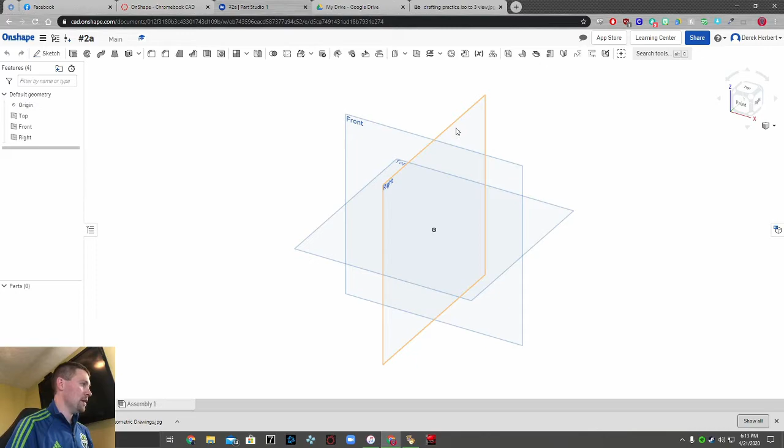So we are going to start on number 2. I know we already got a number 2 in here, so just name this number 2A. Make a new document and call it number 2A. This is on the second document that I gave you. If you want to practice on the other ones, that'd be cool too, but we're going to start on number 2. It says page 230 at the top left. If you see that, you're on the right page.

Okay, so we're going to start a new sketch and select the front view here. These are a little bit more detailed, I guess. We're going to hide all planes here, so it's going to end up being a lot like the first example. We're just going to cut a little tiny piece off, so we're going to show you how to cut things off, cut some of the material away.

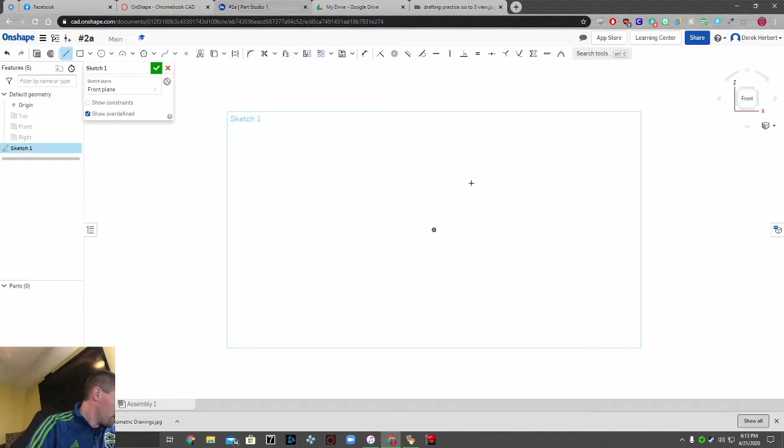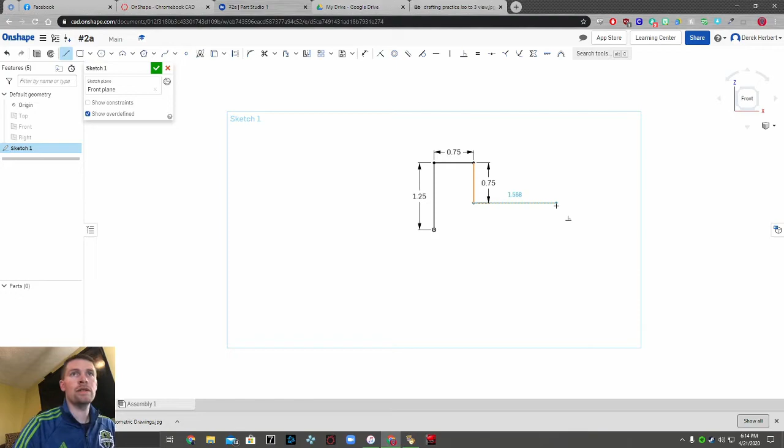So let's go ahead and start by building our part here. It looks like it's going to be 1.25 tall. This edge is 0.75. This will go down 0.75 this direction. 1, 2, 3, 4 blocks is 1 inch. Down and back across. Okay, so there's your dimensions. Again, I'm just multiplying all these little boxes by 0.25, so we'll be working with those dimensions.

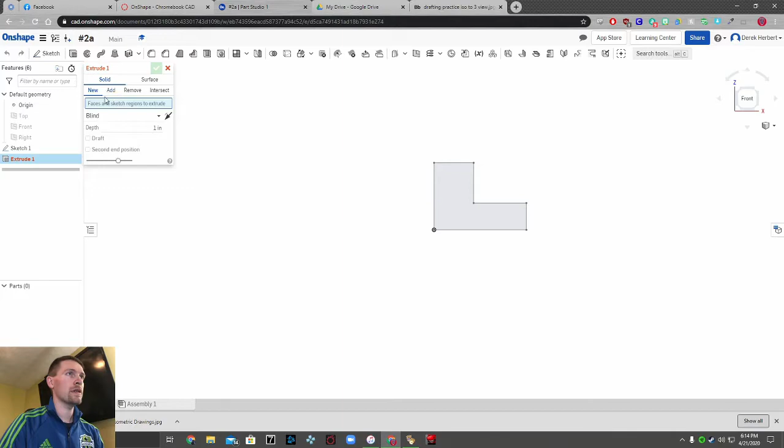We'll click accept, we'll extrude it, and we're going to extrude this box. 1, 2, 3, 4, 1 inch. Bam. Alright, once you got that, we are going to make a new sketch.

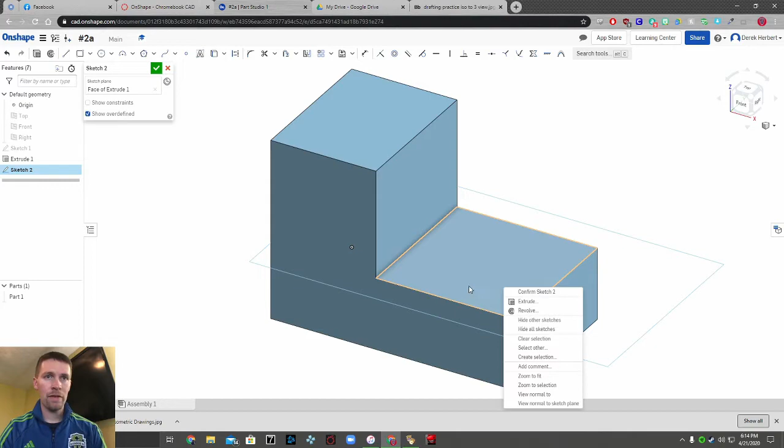We're going to cut out this section right up here in front. I'm going to make a sketch, click on the top of this box right there, then we're going to look at the face. If you right click on it, go to view normal to. I'll rotate you around, and we're going to draw a rectangle from the bottom corner.

Blam. This is going to be 0.5 down here, and 0.25 across the top. Alright, and we are going to try and cut this out.

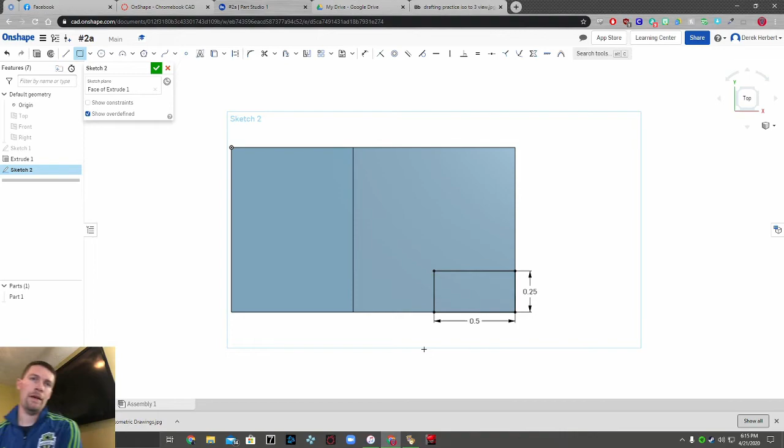Oh, say hi, Clayton. Say hi, everybody. Or not, he's still tired.

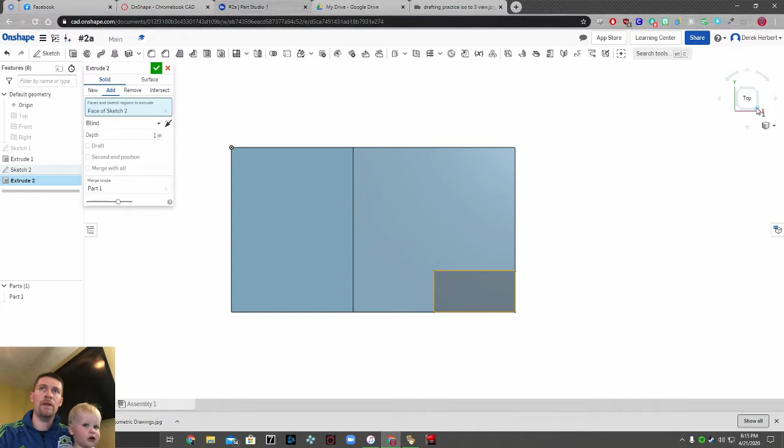He just woke up. So we're going to click on the old green check mark up here, and we will extrude this by clicking the extrude button. We'll extrude that thing. I'm going to go to this side, to one of these corner views. We want to remove it this time, so instead of add, we're going to go to remove. We'll cut our little hole, our little notch right there. So remove just cuts a piece of your part off. We'll accept that, and there you go.

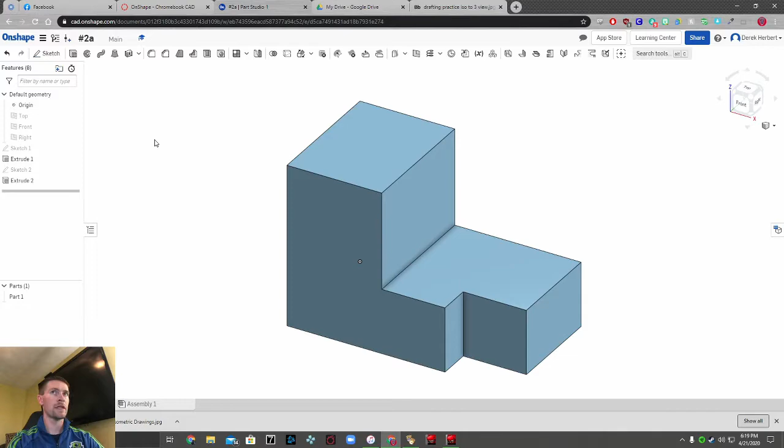All right, so we're going to keep on cracking here. Let's go back to OnShape. We're going to create a new document once again. This time we are going to do number 4. I think this is the only number 4 that we've got. Yeah, so we'll leave it at number 4.

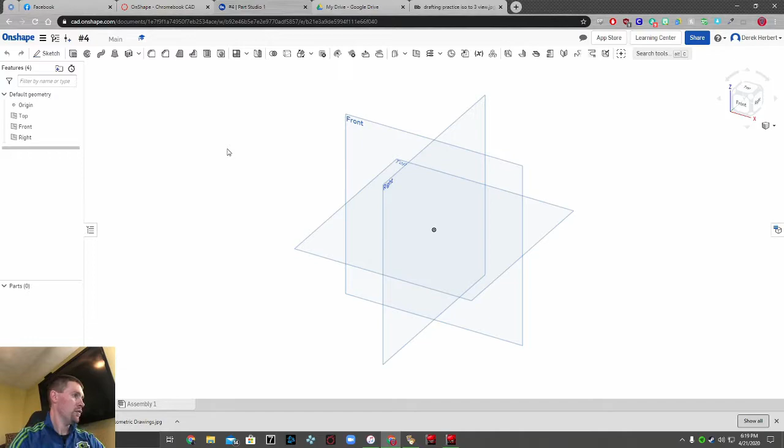Okay, so number 4, again, if you look at page 230, we're going to start with a new sketch on the front. Off all the planes, and we are going to look at the front view here. We're just going to do a rectangle, so start your rectangle, again just click.

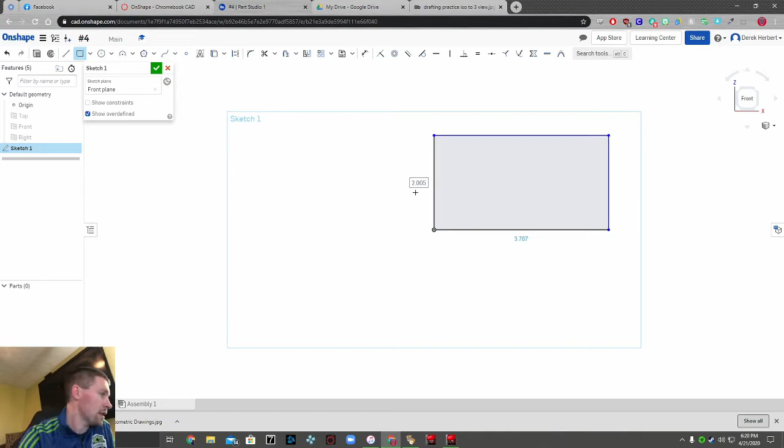We'll put on these dimensions here soon. And it looks like if you just mouse over the dimensions, they get selected, so that's pretty good. So we need this thing to be 1, 2, 3, 4, 5 tall, so that's 1.25. And the width, 2, 3, 4, 5, 6, 7, 8 is 2 inches. 1.25 by 2 inches. We will go ahead and accept that sketch.

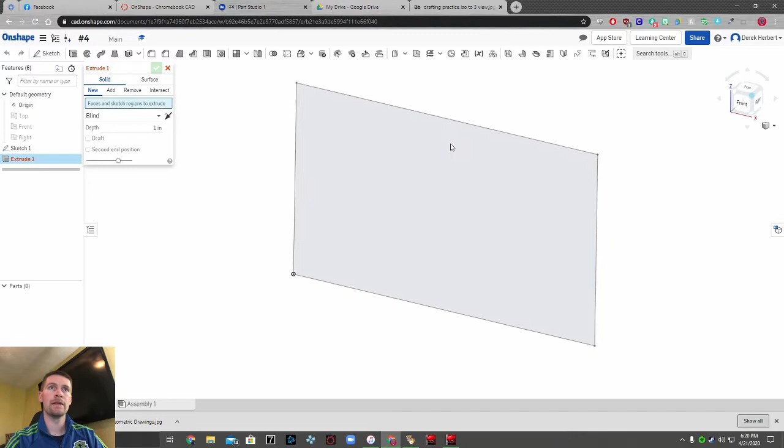We're going to extrude it. Extrude that block. This is going to be 1, 2, 3, 4, 5, 1.25 wide, 1.25 there you go, is our depth. Boom, there we go, there's our basic block.

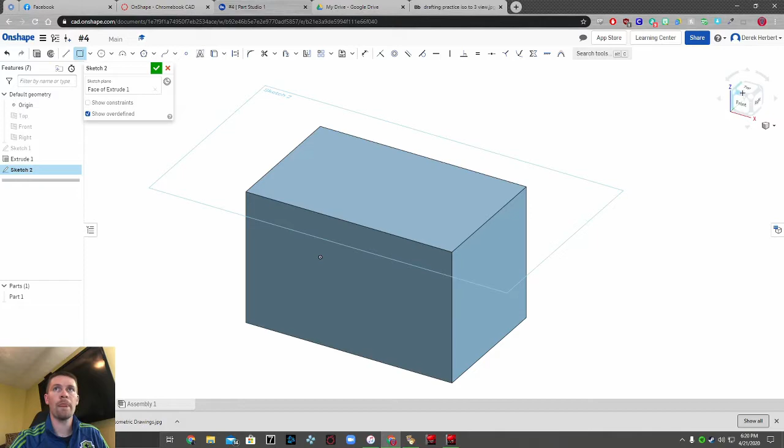So we're going to cut. We're going to make a new sketch on the top piece up here. So just up top here, we're going to draw a rectangle on the top face. We're going to start somewhere, it doesn't matter where on this line, just try to stay close over here. Just don't start it on the corner, it's gonna not work. Start somewhere down there on that line.

This is going to be 0.5 tall and 0.75 wide. We're going to use our dimension tool like we did last week, dimensioning from this line to this line, which is going to be 0.25.

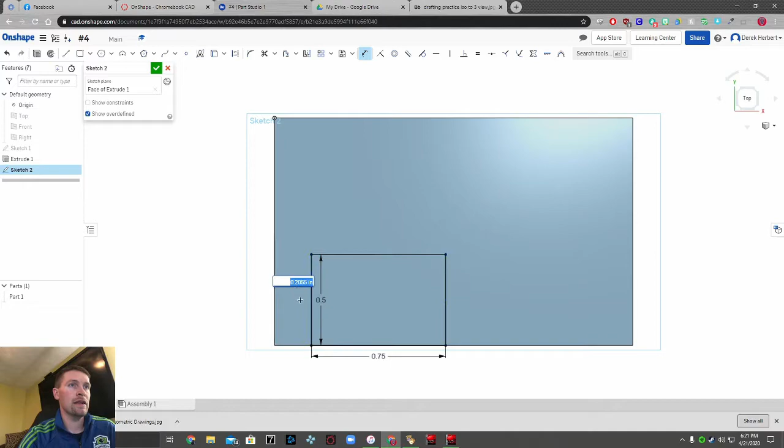Now we're going to extrude that. Let's click the green check mark, go to extrude, and go back to our isometric view. We're just going to extrude this piece right there.

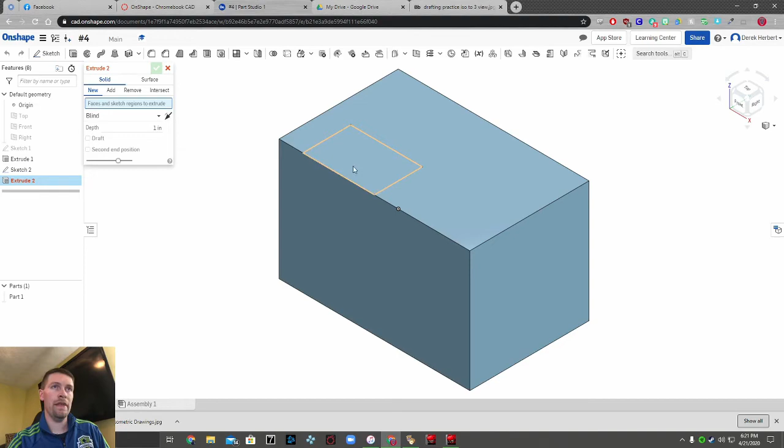We're going to remove it, so click on remove. We want this to go all the way through our part. You can click on that arrow and type in 1.5 or 1.25, and click OK. That's our first cut, and the second cut only goes about 0.75 deep.

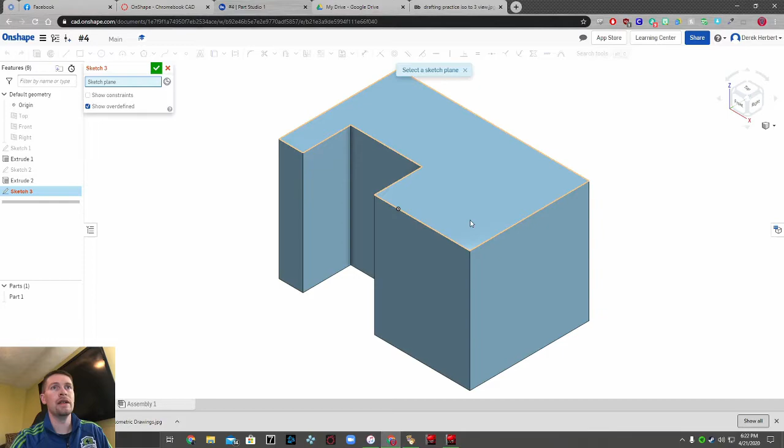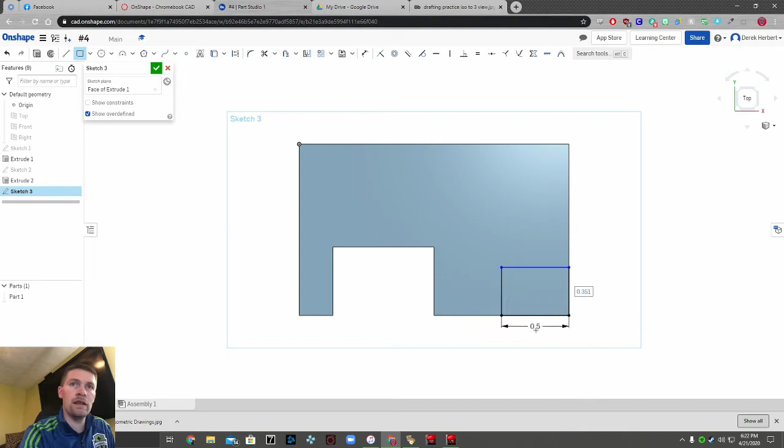So we're going to make another sketch up here. Again, sketch, click on the top face, right click, and view normal to. We'll draw another rectangle, a corner rectangle, and this time start in the corner. This is going to be 0.5 on the bottom and 0.75.

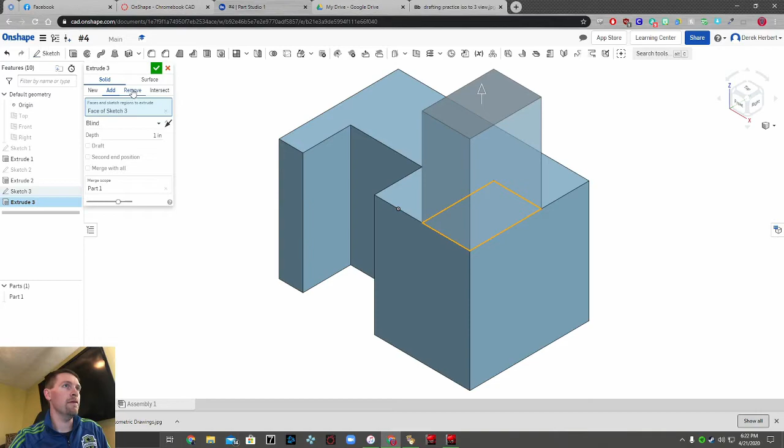There we go, we'll finish that sketch and go back to our isometric view. Click on extrude, this time clicking on the rectangle we just drew. We're going to remove it, but only 0.75 inches deep. Enter, that's how far I want it. Bam, number 4 is done.

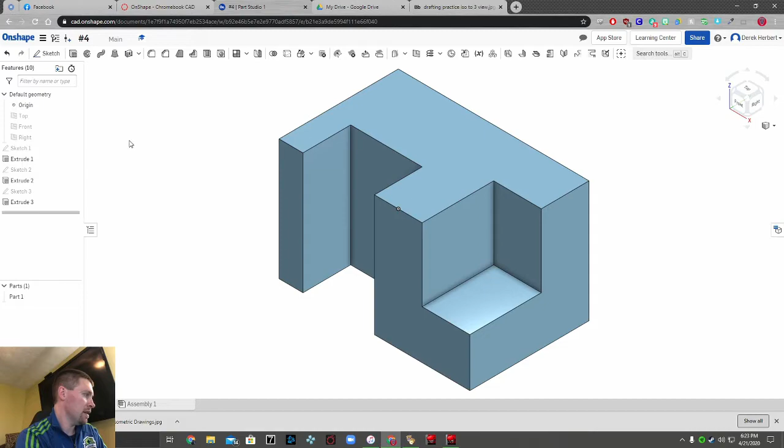Alright, let's move into some harder ones. We're going to skip down a little bit, I think we'll try number 12 next. So go back to our main page, we're going to create a new document and do number 12 this time.

If you look at number 12, it's like an L shape with 2 holes on it and a rounded edge on top. So the first thing we'll work on is the main big block, and we'll just cut everything out of it.

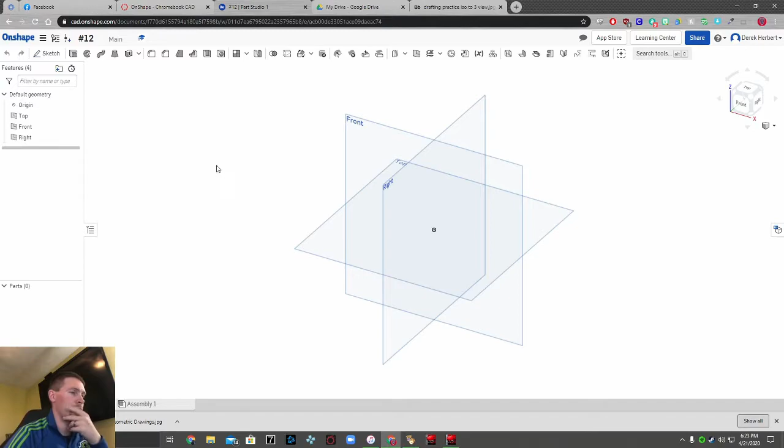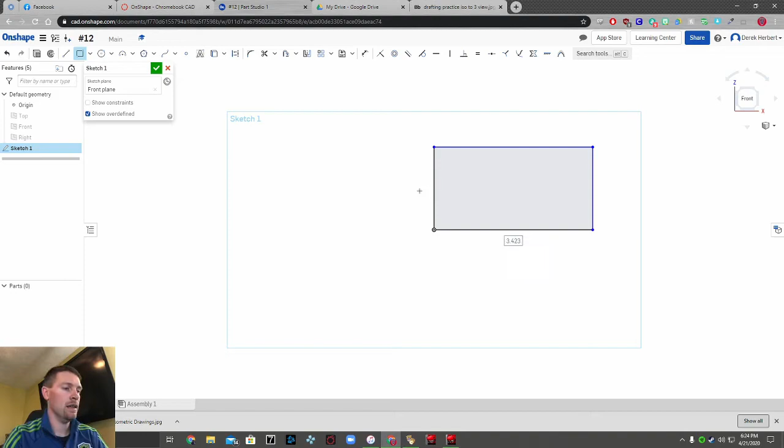We're going to start a new sketch, click on the front, get rid of the planes, and click on the front view. We'll draw a rectangle that ends up being 1.25 high and 2 inches wide. It looks like a lot of these are just the same rectangle, just in different configurations.

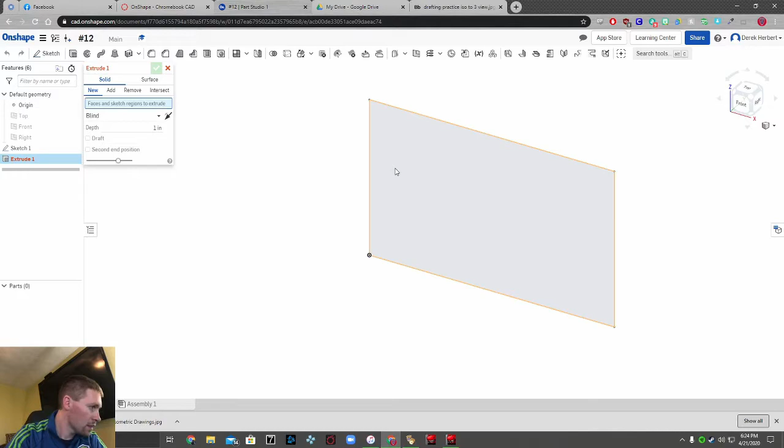We'll finish that sketch, click the green check mark, go to our isometric view, and extrude it. Only 1 inch this time, so yeah, we'll leave it at 1 inch.

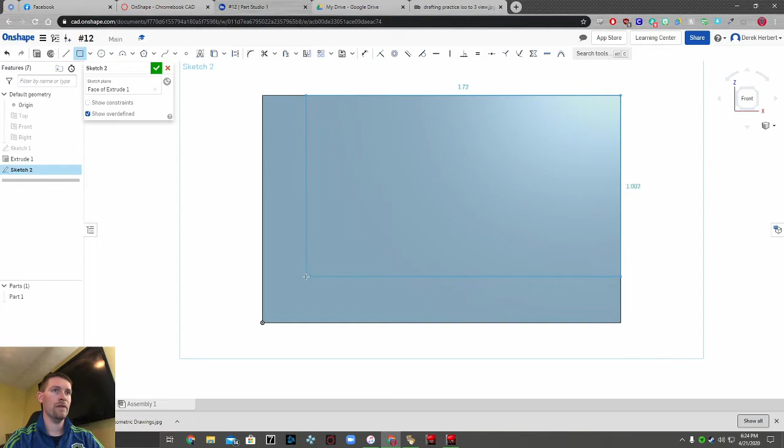Alright, we're going to make a new sketch on the front here. Click on front, and we'll use our rectangle tool to just draw a rectangle here. I'm going to leave it as is, not changing these numbers yet. It looks like we only need 0.25 in both directions.

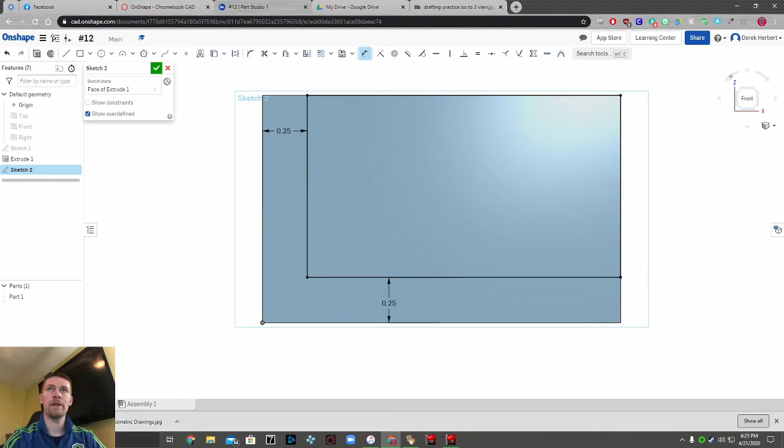So click on dimension up here. We're going to go between these 2 lines, say 0.25, and between these 2 lines it'll also be 0.25. Just use that dimension tool, click on both lines, and separate them by 0.25. Then we'll finish our sketch.

Go back to isometric, extrude, and click this big rectangle here. We're going to remove it, and we only want to go 0.5 inches, half an inch. Enter, that is what we want.

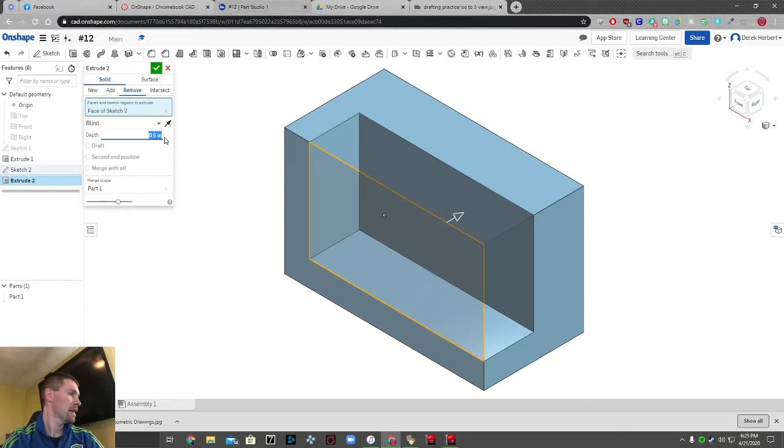Save it. Alright, up to this point we've done all this stuff before. Next, we're going to add some new stuff from OnShape. We've done it in Inventor, but we haven't done it in OnShape yet.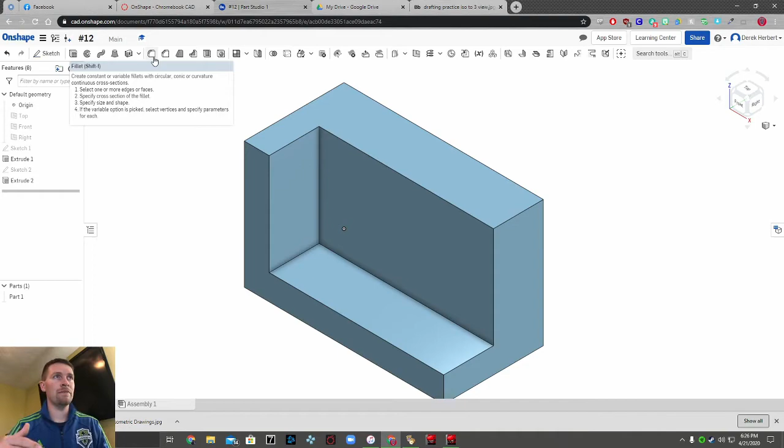So we are going to go to a new... actually, let's go ahead and do the fillet first. So we're going to click on fillet. Remember, a fillet is like a rounded edge, while a chamfer is more of an angled edge, but a fillet is more rounded.

You've got fillets and rounds. We're going to click fillet, then click the edge we want to fillet, this corner right here. It's going to round it. We want our radius to be 0.5 inches, so enter 0.5, press enter, and that looks right. We'll leave it at that, 0.5.

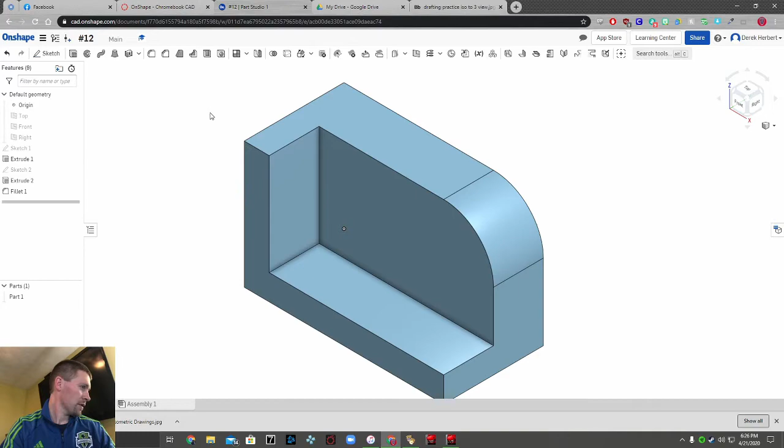Click the green check mark to enter. Then we're going to put 2 circles in here. We're going to sketch, clicking this back face, the little back nook.

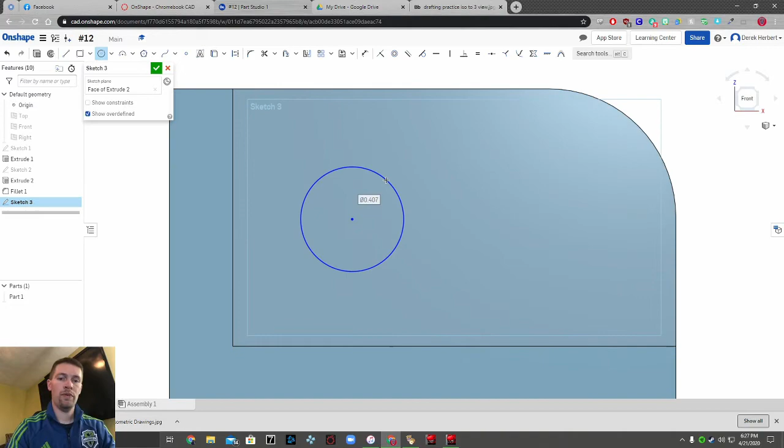Click that, and we're going to make our front view. Then we're going to put 2 circles, using a center point. These circles are going to be 0.5 inches big. Just put 2 0.5 inch circles there.

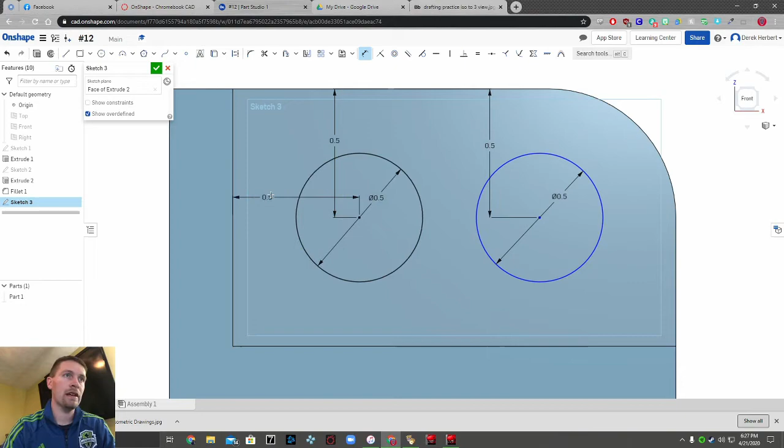Using dimension, they are both 0.5 away from the top. Click dimension, from the top to the center point, it's going to be 0.5 for both. Top, center point, 0.5. From this line to here is 0.5, and from this line to here is 0.5. So all the dimensions are 0.5. That's pretty easy, just make sure you know which ones I'm clicking on: from the right side of the center point, top to the center point, top to the second center point, and then this middle line to the center point. They're all 0.5, so just type in 0.5 when you get to it.

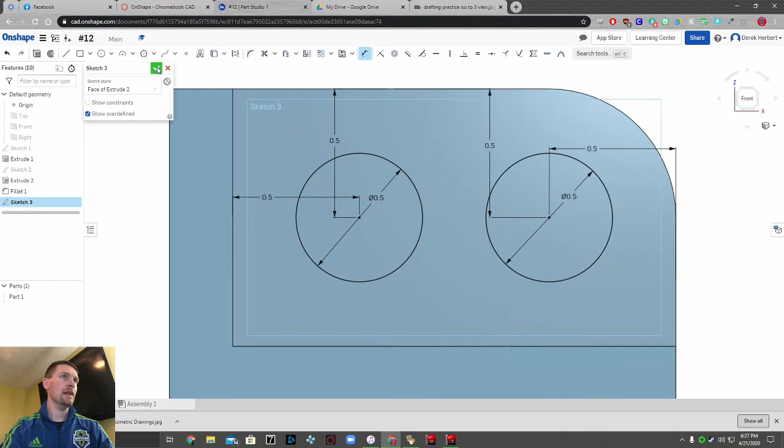Okay, I'm going to click enter. We will go back to our isometric view. Click on extrude. We're going to remove, so we're going to make these holes. Click on both of them. They should go all the way through the part. Perfect, and enter. Done, alright, done on that one.

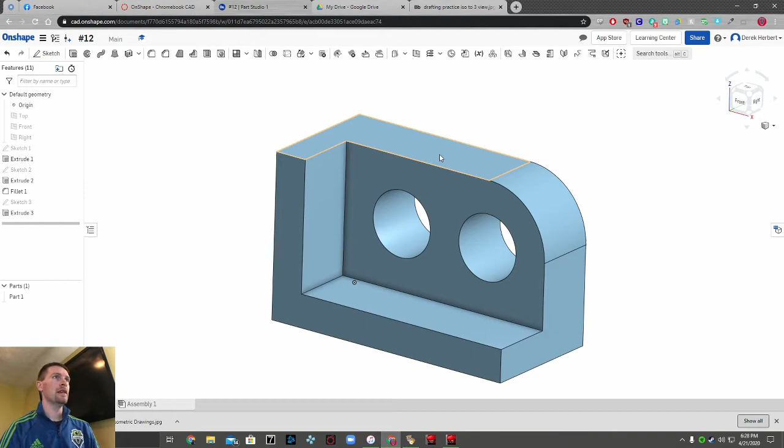Hi, this is my daughter Alana. She's going to be helping us out today.

So class, we are on number 13 on page 203, way down at the bottom. We're going to start by making an L shape on the right side plane. Let's go up to sketch, click on create new sketch.

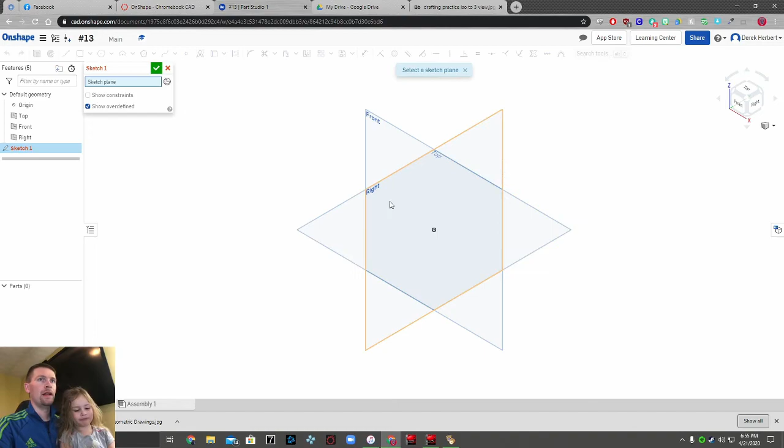We're going to click on this right plane right here. We're going to right click and hide all those planes. Click on the right side this time, not the front, so make sure you hit that right side. We're going to start by drawing the L shape on number 13.

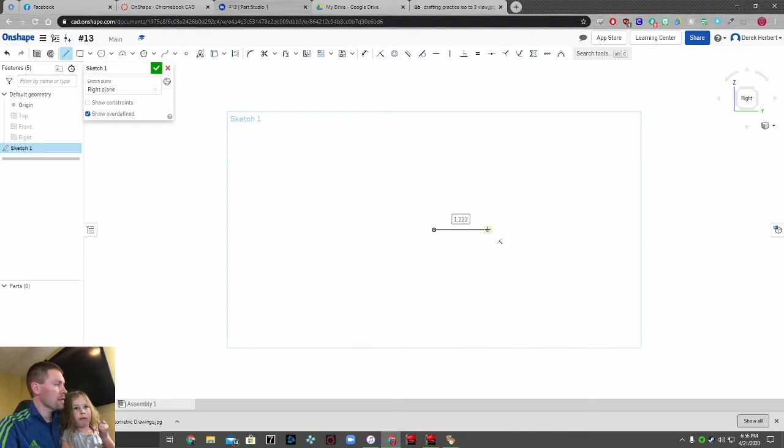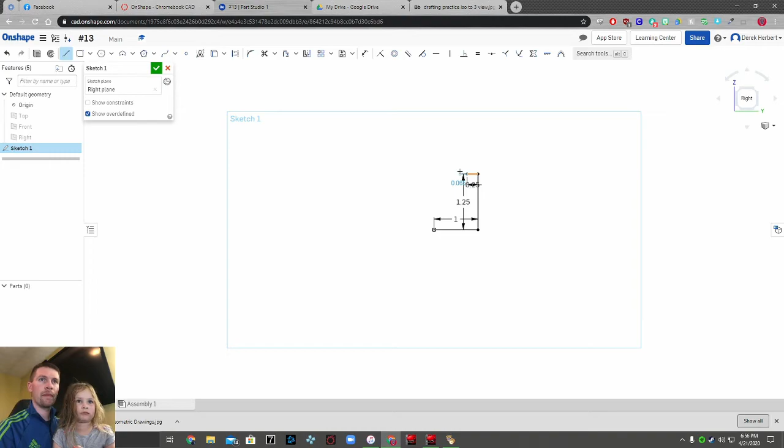I'm going to go over to the right, looks like we're going to go 1 inch. We're going to go up, straight up, we need to go 1, 2, 3, 4, 5 - yeah, 1.25. I'm going to go to the left just 0.25, down 0.75, and then we're going to go over and down to finish that piece.

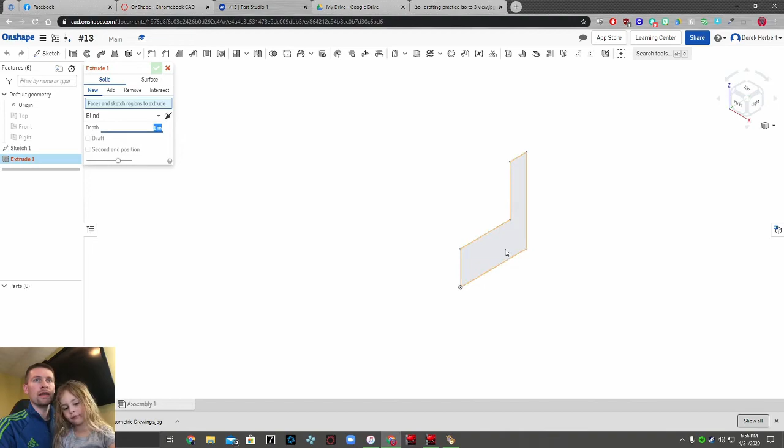Let's go ahead and click Finish Sketch on Sketch 1. We'll go back to our isometric view, zoom out a little bit, and we're going to extrude this piece to a depth of, hold on - 1, 2, 3, 4, 5, 6, 7, 8, so 2 inches. To enter. Alright, go ahead and click accept.

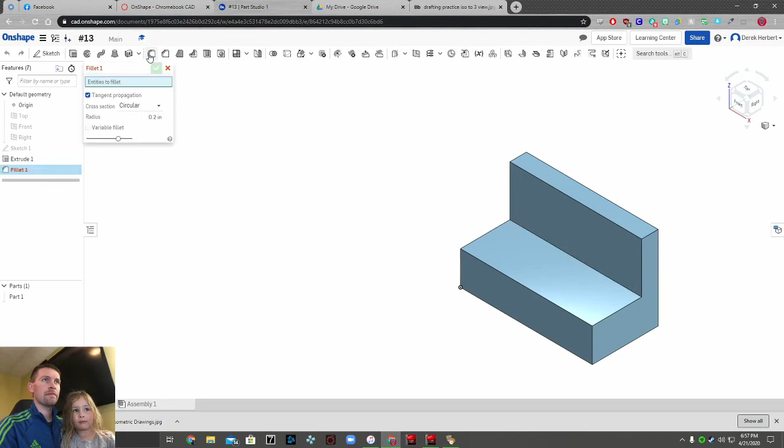So if you look at number 13, we've got 2 fillets on both of these top edges. Let's go to fillet, up here, right here, the rounded edge. Click fillet, and we're going to click on this and this corner. We want to change our fillet value to 0.5. Press enter to check it out. Looks good to me, press OK.

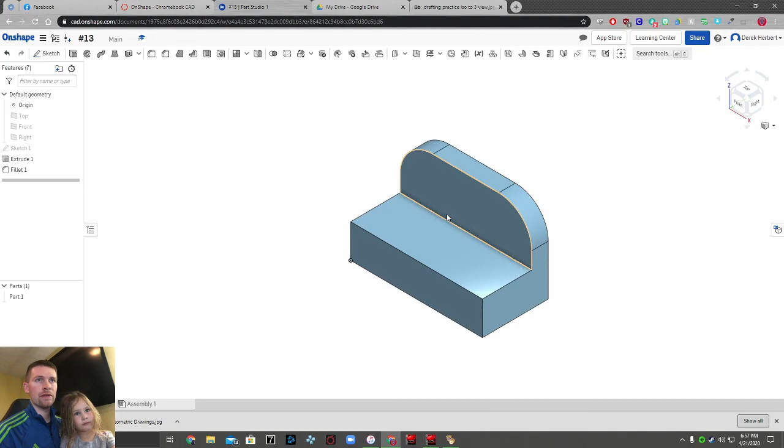Then finally we're going to put a semicircle on the bottom down here, a little semicircle across the bottom. So click sketch, we're going to click on this top face of this little shelf piece right here. Click on that, we're going to look at it - view normal to.

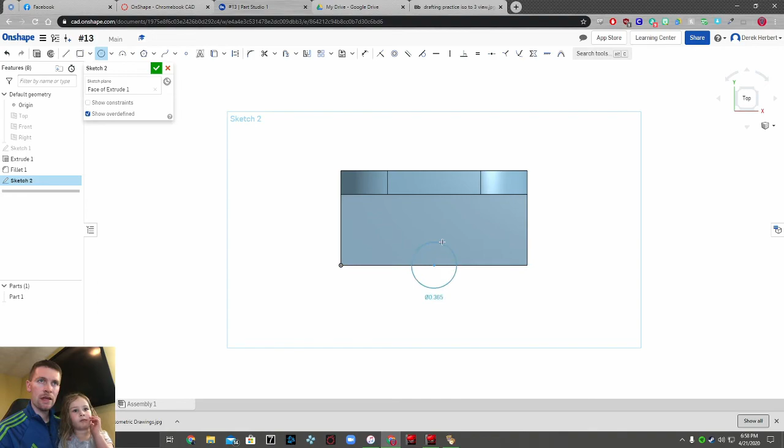We're going to draw a center point circle, so click on that. This center point circle, as long as you put it somewhere down here, actually it's going to put you at that midpoint - that's what we want. Click on the midpoint, the little yellow square. This circle, we want to be 1 inch across, so 1 inch in diameter.

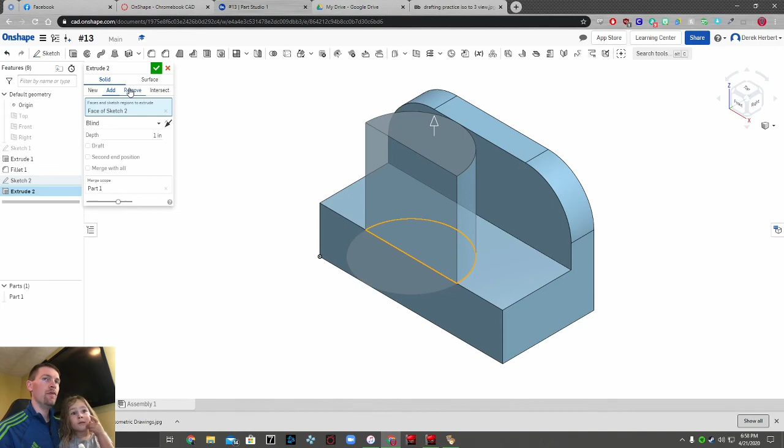Finish that sketch, go to extrude. We're going to go back to our isometric view. This time we'll click on that semicircle, and we will remove it to get rid of that material. Green check mark - bam.

Number 13 is done. Alright, so hopefully that helps you out with those 4 problems. This will be this week's assignment. If you get this done early, that's great, because the next assignment is going to be you get to make your own thing, your own idea. I'm going to have a problem for you next week that I will publish, and then you are in charge of making some sort of a part that goes along with that.